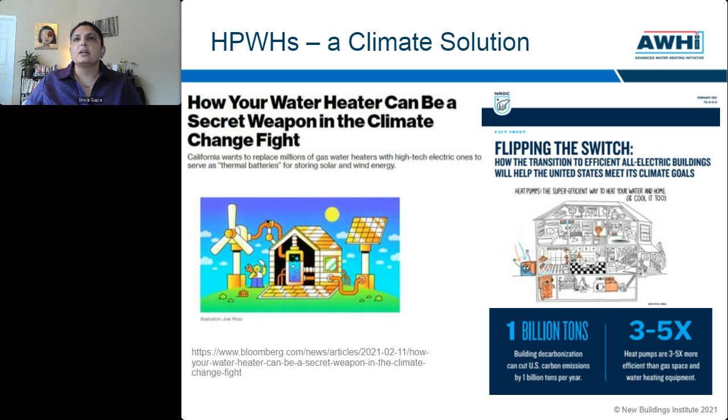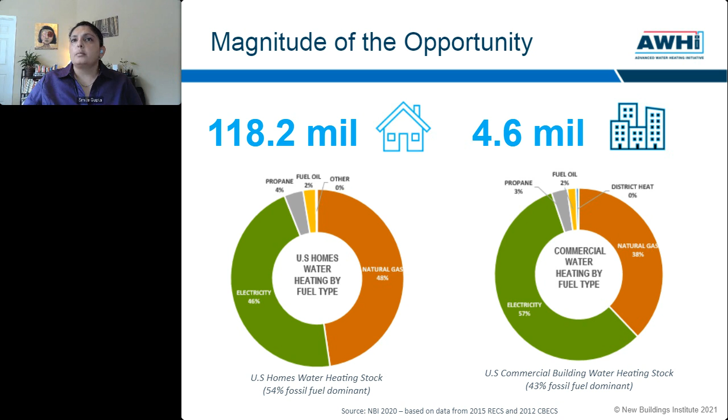And really, if you come down to numbers, the magnitude of the opportunity in US homes is significant. Water heating by fuel type is 54% fossil fuel dominated, so there's potential for moving that to heat pump and decarbonizing it. In the commercial sector, it's also in the 40+% range between natural gas, propane, and fuel oils. The building stock represented here is in the hundreds of millions of homes and 4 million commercial buildings.

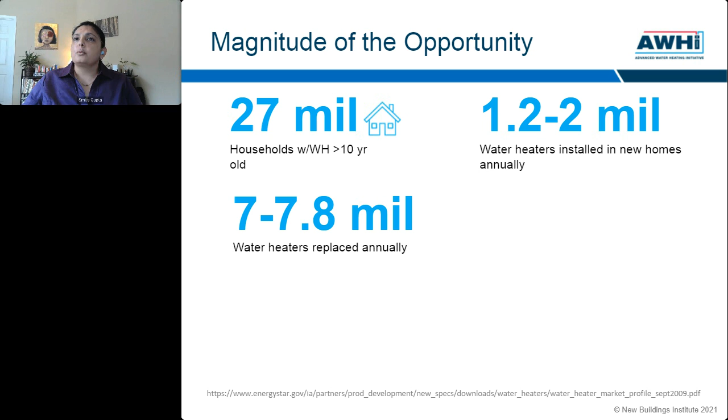To put some big numbers to the magnitude: there are 27 million households with water heaters over 10 years old, again potential to swap all of them out for more carbon-friendly heat pump water heaters. There are around 8 million water heaters replaced annually, another opportunity to move those to heat pumps. Almost 2 million water heaters are installed in new homes annually. And 30 million is the potential capacity of the market to install heat pump water heaters.

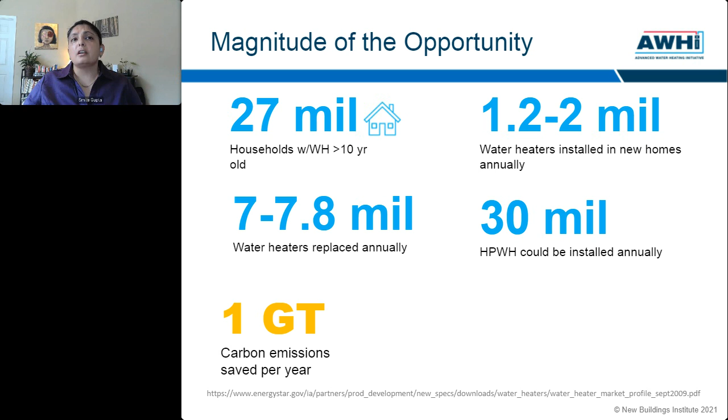What does that convert to in carbon emissions? That represents almost a gigaton of carbon emission reduction saved in a year. To put it into perspective, that's like taking out 26 coal-fired power plants. And even if you compare heat pumps to what we've come to know as very clean generation — distributed solar, which has matured over the last decade and a half — heat pump water heaters really stack up well against those as well.

Add to that the demand response potential, which is taking out the dirty peaker power production that's needed. With controls added, the heat pump water heater has the potential to add another 20 to 40 gigawatts of demand response potential. This is an analysis done by my colleagues at NBI, which shows that the heat pump water heater compared to other traditional water heating types, electric and standard gas and tankless, has low carbon emissions.

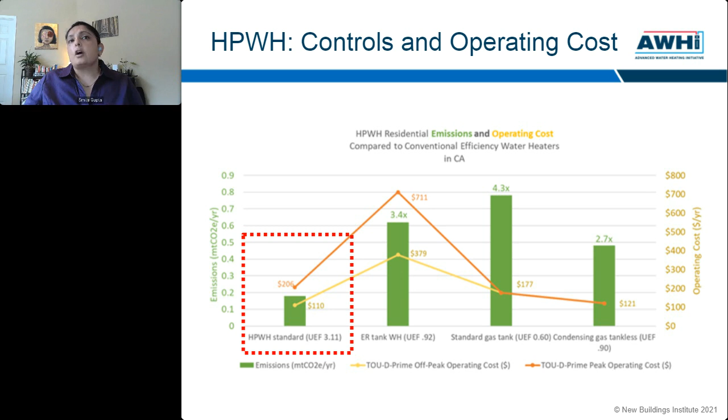Having established that magnitude, I'll cover the overview of the Advanced Water Heating Initiative, which started on the West Coast, the Pacific Northwest, and California, and has been operating for almost 2 years now, led by NBI, along with our funders and partners: Bonneville Power, Southern California Edison, NEEA, SMUD, Building Decarb. You have the website link here and with the presentation, and you can visit there for more links.

The initiative represents over 50 organizations and has over 100 active members representing several different market actors in the industry. As you can see, the mix is manufacturers, utility participants, industry associates, and cities and program administrators.

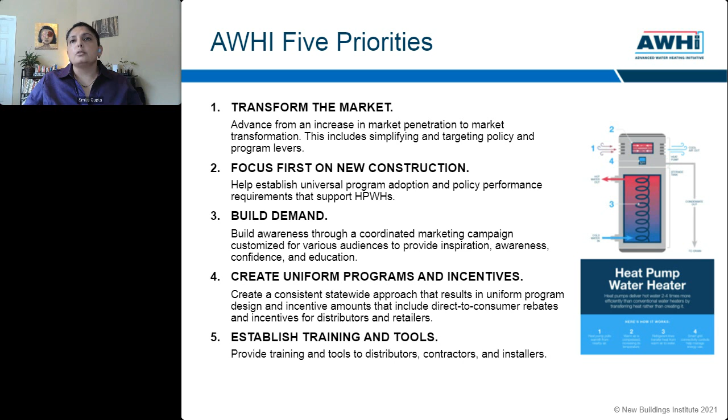There are 5 key priorities. It's primarily a market transformation initiative. First is transforming the market to increase adoption and penetration of heat pump water heaters, along with focusing on new construction first, where the barriers to entry are relatively lower compared to a retrofit or swap out, and building demand with more awareness through marketing campaigns, and creating uniform programs and incentives along with training and tools for a more holistic approach to transforming that market.

It's operationalized through 4 working groups that have been operating over the last almost 2 years. In fact, you'll hear from my fellow panelists, Owen Howlett and Kashmira McVeigh, who lead 2 of these working groups. The working groups focus on the unitary market, which is 240 volt and 120 volt, and central, and also a working group dedicated to moving the needle on the controls element of the heat pump water heater.

There have been several successes and deliverables over the almost 2 years of operation of the initiative. It started at an exposition and workshop at SMUD. Title 24 has adopted demand management standards. There are 120 volt units, which is one of the key things that has changed in the market for the heat pump water heater, especially the retrofit market, which avoids panel upgrades - these will be hitting the market later this year, just in the short time since the initiative started.

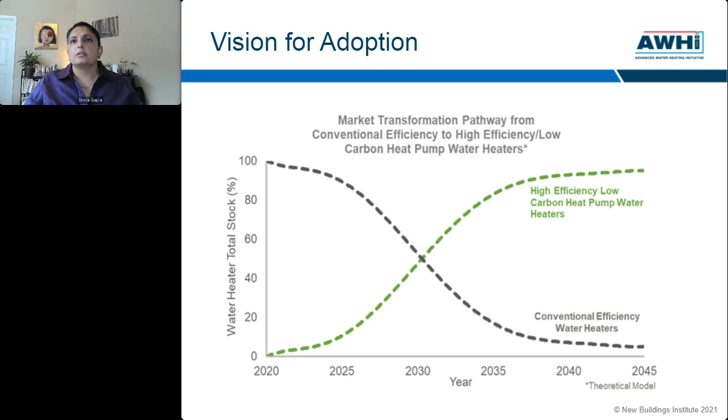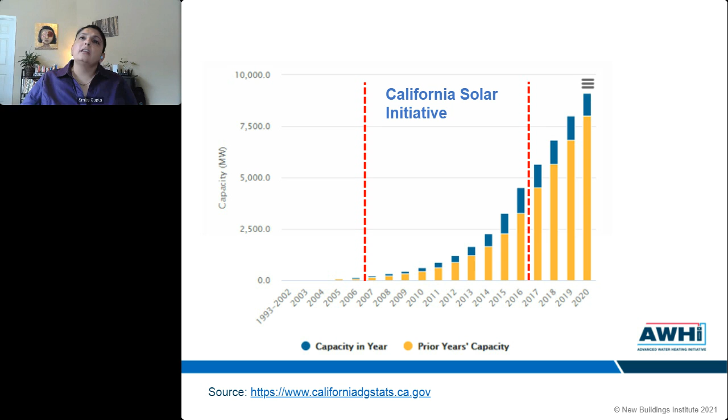Having spent over a decade in the California Solar Initiative, as that came of age in terms of distributed solar or rooftop solar, as we now ubiquitously know it, the goal of the California Solar Initiative was to install 3,000 megawatts of solar over 10 years. Through a focused initiative, that was not only possible but exceeded that goal. Even at the end of the program, the market has continued adoption. So that's the kind of market transformation and success that we really need for the heat pump water heater.

With that, I'll end my presentation. Back to you, Amrita. Thank you, Smita. That was great. I am going to now hand it over to Gary. Gary, do you want to take it from here? Yes, thank you very much.

So I want to talk a little bit about the tensions between codes and incentives. I don't work directly on the heat pump, the Advanced Water Heating Initiative, at the moment. I focus on hot water as a system, and I want to spend a little bit of time looking at the way we go about our overall program activities. So I have some discussion points, and I hope they'll come back to us during our discussion later.

The first one, I think we want great buildings. My first question is, are we really getting them? Do you want to live in a production dwelling that is built according to regulatory and program rules that have been promulgated, or without any additional information? So I have an observation: I don't think we're getting great buildings. I think we get something that's probably a bit better than minimum code.

But the question is, is minimum code great performance? No, not necessarily. So I think we have to create an overall approach that gets to great buildings. In the case of hot water, I want great hot water systems. I don't want just great water heaters, it all has to work together.

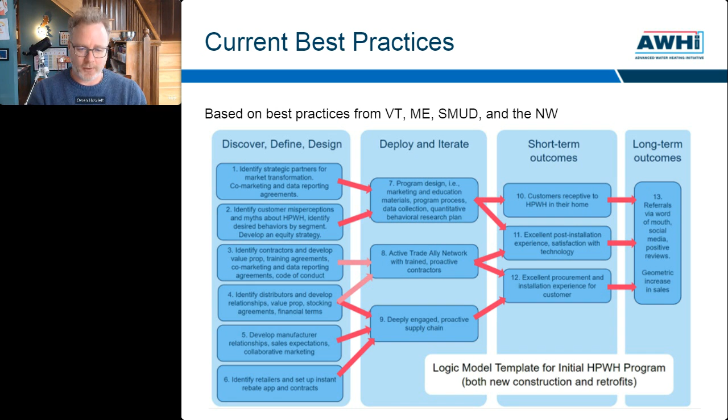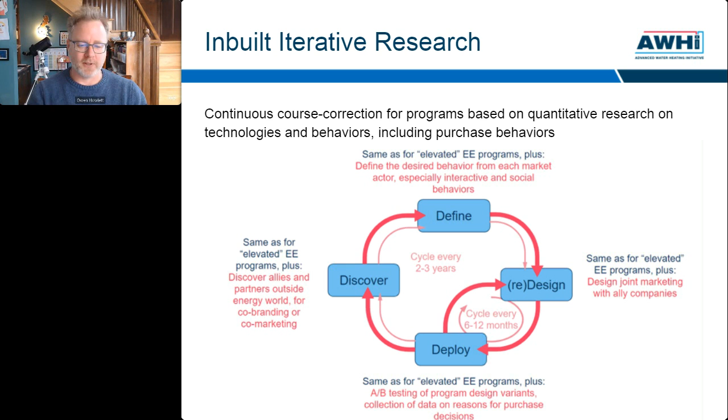And then again, this is another excerpt from the report—a little graphic showing different cycles on which research can be used to inform program design. So you can have some very fast turnaround research cycles that inform quick decisions about the program, and then you have some longer cycles which are required for longer stock taking, M&V, and program redesign.

We've also recommended in the report some immediate goals. These are 3 to 5 year milestone goals, and the intent here is, and this is just for California utilities, so you can scale up and scale down for different parts of the country. The point of these goals is, if we are going to get to 10% market penetration in 3 to 5 years, these numbers represent roughly what that needs to look like, based on assumptions.

The top table shows you the assumptions about what penetration rate we're getting to in each one of these sectors. The table at the bottom is how that translates to an actual number of water heaters that would be purchased and incentivized by programs. So this shows roughly what's required for each utility, where each utility needs to get to in California to do their part of this market transformation.

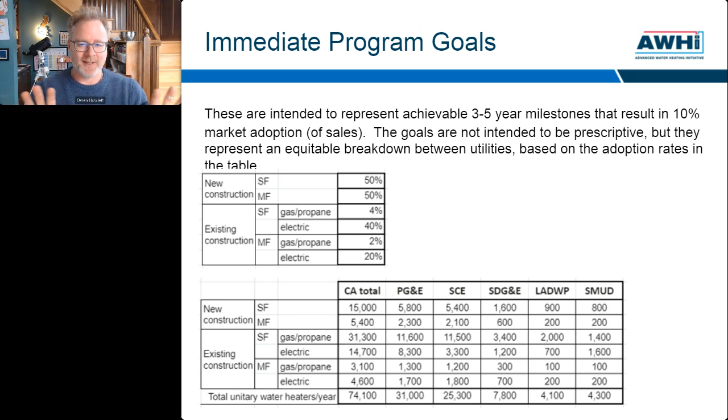These do not represent goals that anybody has committed to. These are entirely suggested and voluntary at this point.

So the report has recently been completed. This is, like I said, the culmination of 7 or 8 months of work by a whole bunch of people of very different backgrounds. So we think it's a pretty good piece of work. I encourage you to download it at this link.

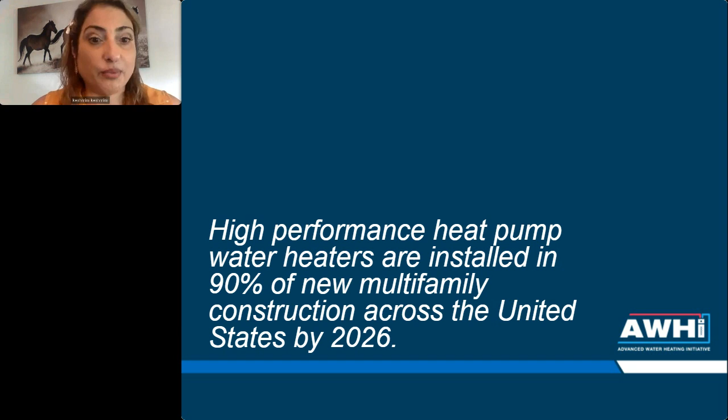For the Central Heat Pump Water Heater Initiative, as part of the Advanced Water Heating Initiative, we have a pretty auspicious goal. We sat down last fall and decided our goal would be high-performance heat pump water heaters, central systems, will represent 90% of the products in new multifamily construction across the United States in the next 5 years. And we said, wow, that's pretty intense.

So how do we want to reach that goal? And in order to reach that goal, we kind of scratched our head. We said, well, what tools do we have to do this type of mass accelerated market adoption? And how are we going to get there? And whose help are we going to need to make this happen? What's the easiest way to break down this problem and make it start working?

And so we thought to ourselves, well, we need to have products that are competitively priced everywhere with the next best technology. We need to have performance in a plug-and-play type of system. We can't waste a lot of time and money and certainty on custom-engineered systems. We want things to be plug-and-play, low GWP. We want to see the performance measured as the entire system.

We want to have multiple manufacturers in the market. We want known, quantifiable, repeatable savings. We want to be able to facilitate manufacturer engagement, and we want everyone in the market, from manufacturer to end user, supplier, distributor, designer, building owner, architect, engineer, to know about the product and want the product.

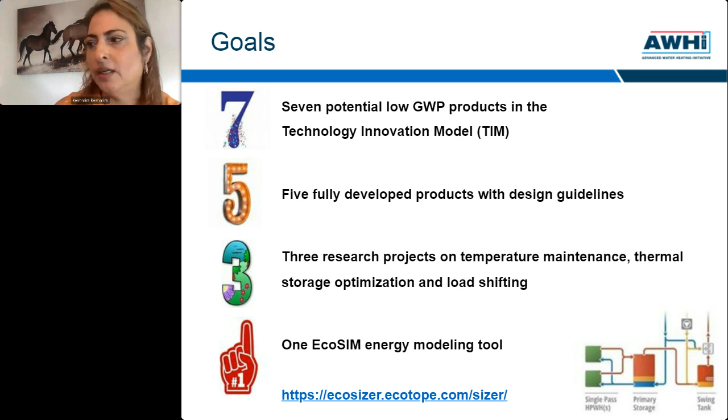There's a lot more detail behind this, but our products team is really hoping to design plug-and-play systems. We want to be able to create a sizing calculator, have a system developed, sized, put it on a skid, and have it drop shipped at a job site for new construction.

So we're hoping to see 7 new low GWP products, central heat pump water heater products, through our technology innovation model in the next 2 years. We'd also like to see the design guidelines that support 5 new systems. That's what we're hoping to do.

We're also going to be creating additional research on temperature maintenance, thermal storage, and DR. We plan to have 3 projects in the next few years.

Part 1 of our plug-and-play engineering design systems has been developed. That's the EcoSizer, which can be found there. That link is available for anyone to use at any point in time. It does the sizing for the system, so you can trade off between energy storage and system size. Our next part will be developing an energy modeling tool, also called the EcoSim.

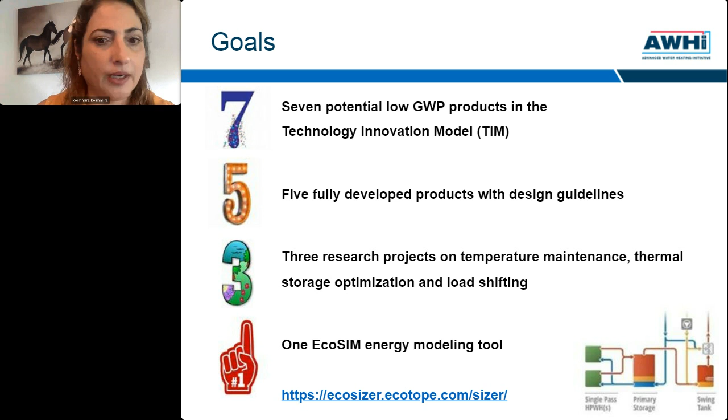Our price team includes the specifications, standards, a pro forma program that other utilities can lift and use, and code development, code tracking, code intervention, comments, etc.

Right now they're working on and plan to wrap up by summer a system specification, an advanced water heater central system specification 8.0, which will include, if you can see in the diagram, what is the boundary?

It's not just the compressor. The compressor alone will not get us the energy savings we want, because when it's hooked up to that distribution system, the storage tanks, the mixing valves, and all the other equipment in the fence line, we're going to start to see a degradation in overall system performance. So they're developing that specification to address the system performance as a whole.

In addition to that, they'll be working on a standard pro forma program that is based on the EcoSim and EcoSizer modeling. So they'll get a tiered incentive for using those tools and sizing the system accordingly, having it developed on a skid and then drop shipped to the site versus custom engineered.

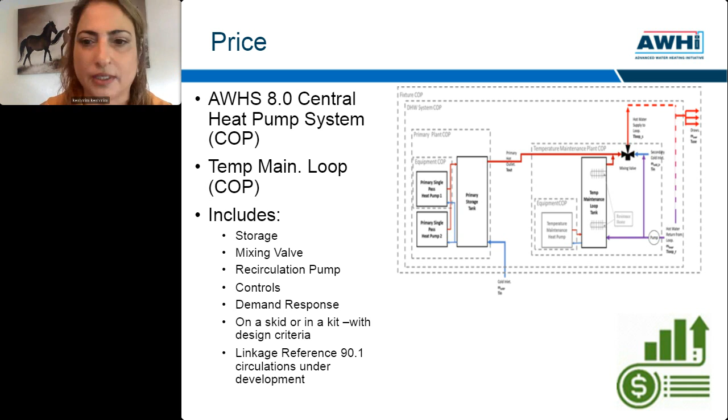If it's custom engineered, where the tools aren't used and people are designing their own things, then we're going to offer a lesser incentive, because that's too hard for utility programs to oversee and administer those payments.

Finally, on the customer side, in broadest terms, our goal is to have everybody know about the system, want the system, understand the system, and have consistent terms and language used in developing, buying, selling, installing, and operating these systems.

So what we're doing, I think that's a little different than our traditional emerging tech approach, is having those swim lanes again—whether it's the specification development, some initial training, and the product development—all being done simultaneously, using that common terminology and common learning as a foundation across all those swim lanes as we develop our program offerings, do our demonstrations, and engage our stakeholders all along the way.

What's really fantastic is we have this platform we've developed that offers in-person training all the way to asynchronous training, and hopefully in the future an online bulletin board and real-time consulting support, all tied together, that any utility can use, small or large, scaled appropriately, to provide people the foundations and tools they need—whether it be an installer, a utility program, an end user, a design firm, etc.—that gives them the information they need to be successful in installing these systems.